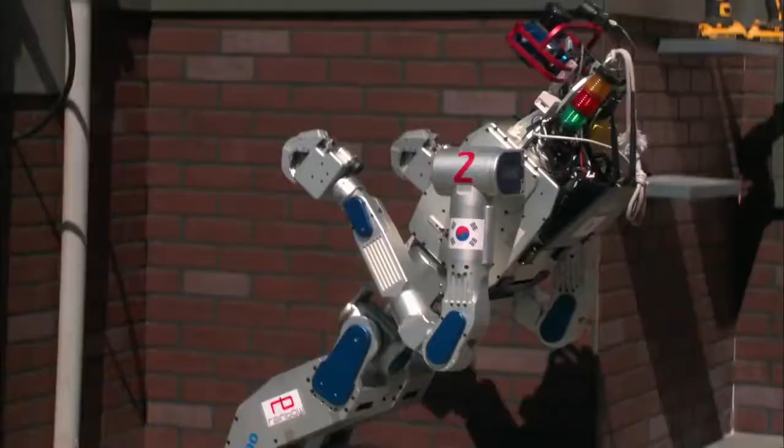It's one of the most ambitious challenges in the history of technology. Ladies and gentlemen, start your robots. The race to build robots that can save lives in a disaster, that can even rescue us. But to do that, they'll need to climb ladders, walk over rubble, turn valves.

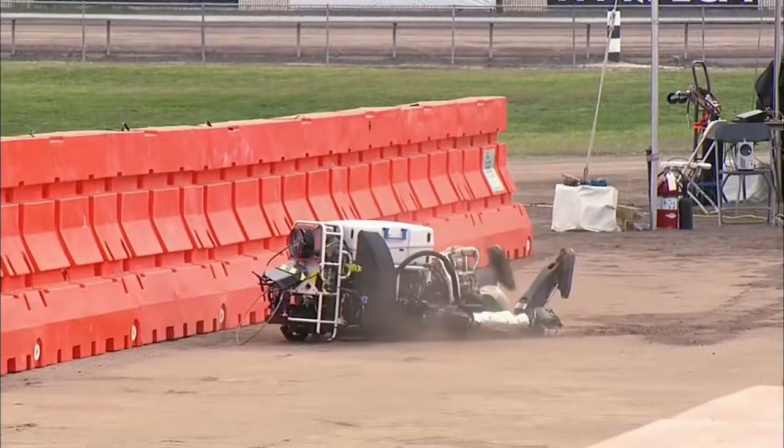And no one knows if it's even possible. There's so many things that could go wrong. It's scary. When you try to instill human-like intelligence, human-like manipulation skills into machines, it's just very, very hard to do. What will it take for robots to have the right stuff?

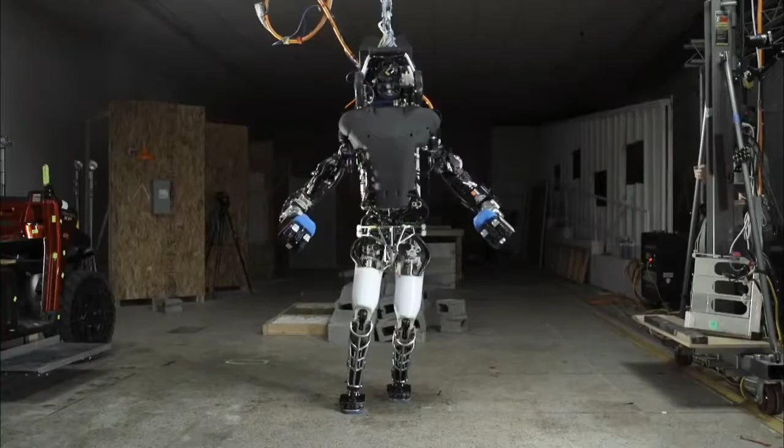And are we ready for the consequences? It's too easy to look at them and say, oh, they're not there yet. They will get to something very powerful. And then you have to say, well, where will we have gotten to? They might actually have the capacity to be smarter than us.

What impact will robots have on our future? On how we work, how we interact, even how we see ourselves.

Rise of the Robots. Yeah! Right now on Nova.

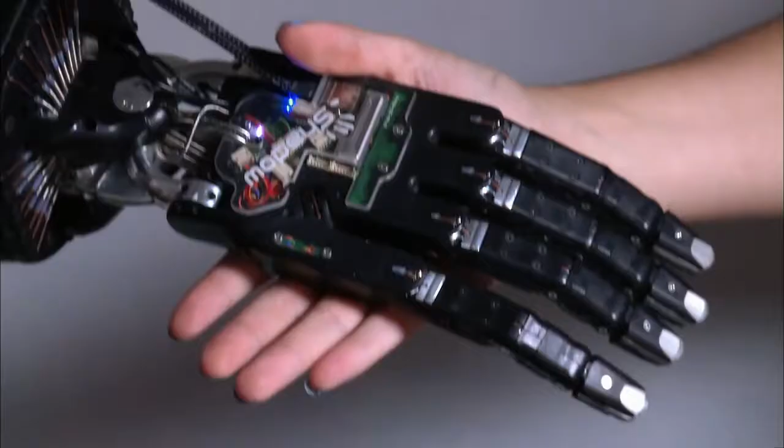Especially in Japan, where bots are starting to cook for us, do the laundry, even sing and dance. Some look so human, it's hard to tell them apart. But looks can be deceiving.

People see these humanoid robots developed in Japan and all these fancy things, and they had the expectation that, oh, we have these robots and they're gonna save the world. But that didn't happen.

March 2011. A devastating earthquake and tsunami rocked Japan. Explosions and fires at the Fukushima Daiichi nuclear power plant left the area dangerously radioactive. Going inside, even for a few minutes, was life-threatening.

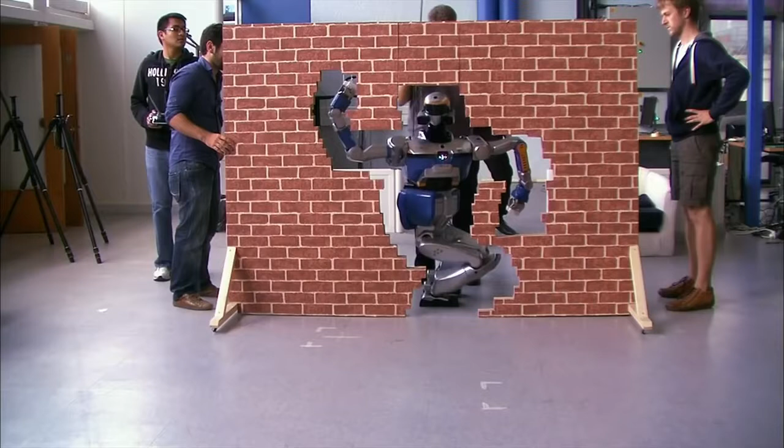It was the perfect time for Japan's cutting-edge robots to come to the rescue. But none did. The real tragedy was if simply some valves could have been turned, or some switches could have been flicked, or hoses attached, a lot of the meltdown could have been prevented. The question was, when robots were needed the most, just how come they weren't effective?

And so I think that led to a lot of reflection. After decades of research, where were our robot heroes?

For generations, science fiction has portrayed robots as our loyal servants. Welcome to Altair 4, gentlemen. I am to transport you to the residence.

But it turns out, our imagination has taken us much further than our technology. It's hard to create robots that can function in our world. One of the challenges with deploying robots in the real world is that the real world is like the wild, wild west. It's very rich and complex and very unforgiving.

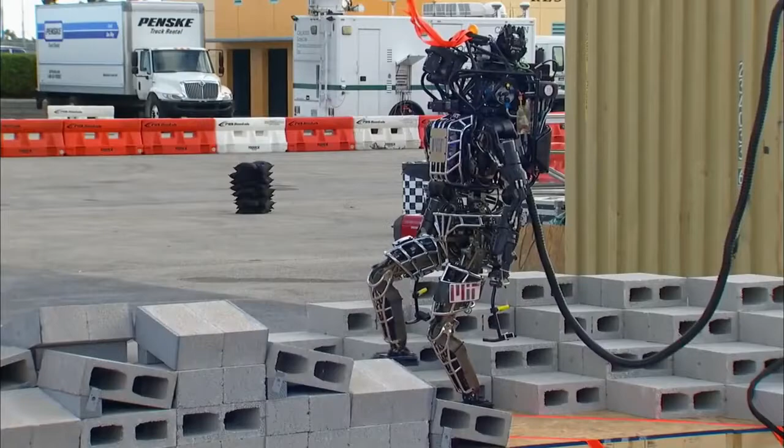What will it take for robots to make their way out of the lab and into the real world? We're about to find out. Ladies and gentlemen, start your robots, at the most ambitious robotics competition in history.

We welcome you to the DARPA Robotics Challenge. This is where imagination meets innovation. You have completed the course!

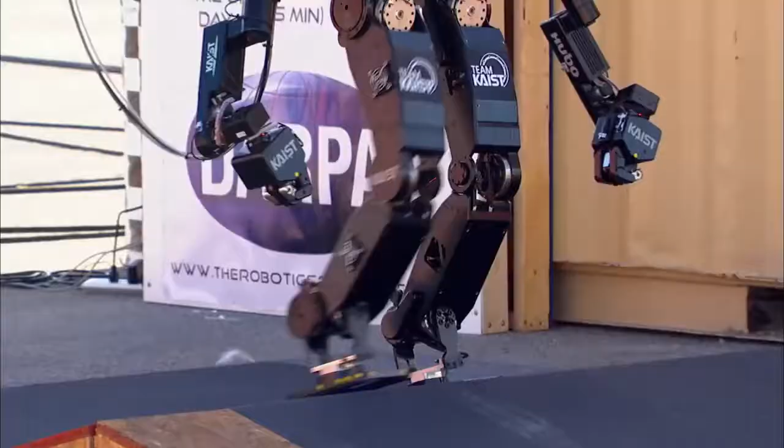In 2013, at a racetrack on the outskirts of Miami, DARPA, the research arm of the U.S. Department of Defense, challenged 16 teams from around the world to build rescue robots that can help save lives in a disaster.

Very exciting, very exhausted, very nervous, and frustrated at the same time. Dealing with robots is always like that. It's the kind of challenge DARPA is known for: cutting edge and high risk.

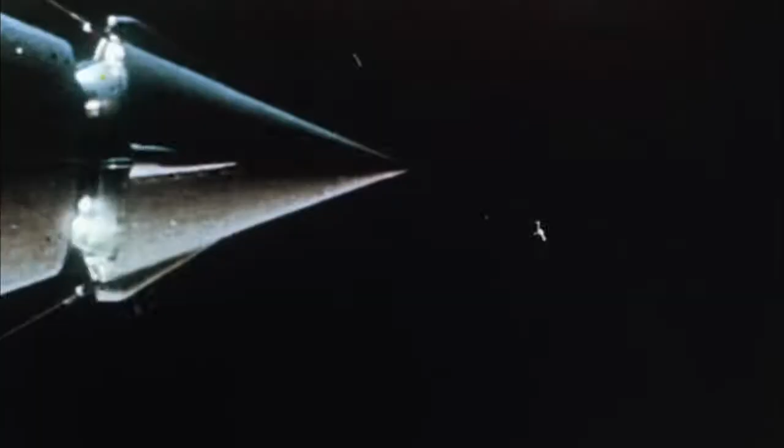DARPA was formed back in the 1950s in response to the launch of Sputnik, the world's first artificial satellite, built by the Soviet Union. Since then, the agency has spent billions developing military technology, advanced weaponry like stealth technology, drones, and night vision.

But the spin-offs from this research have gone far beyond the military. The internet, GPS, bionic arms, even Siri were all fueled with DARPA funding. Cancel golf today, it's off your calendar. Good.

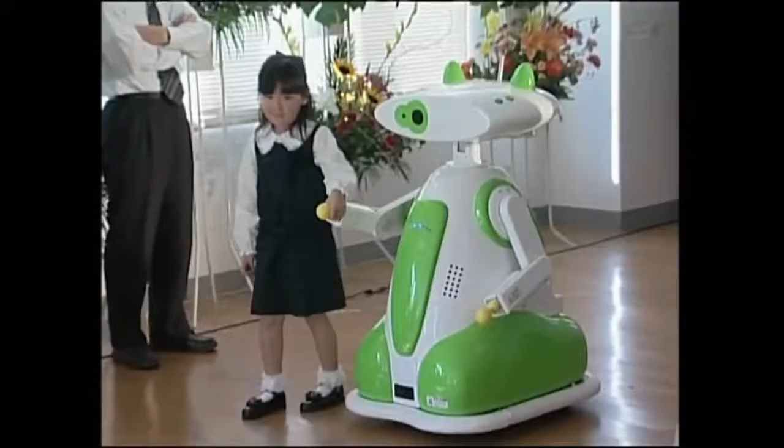If these researchers succeed in creating rescue robots, the same technology could be used to develop robots that take care of the elderly, babysit our kids, clean up after us. Robots in almost every facet of life.

But first, can robots really help out in a disaster? To find out, DARPA has set up an obstacle course for bots, with human operators controlling their every move. Yeah, here we go. The robots must perform basic tasks like opening a door.

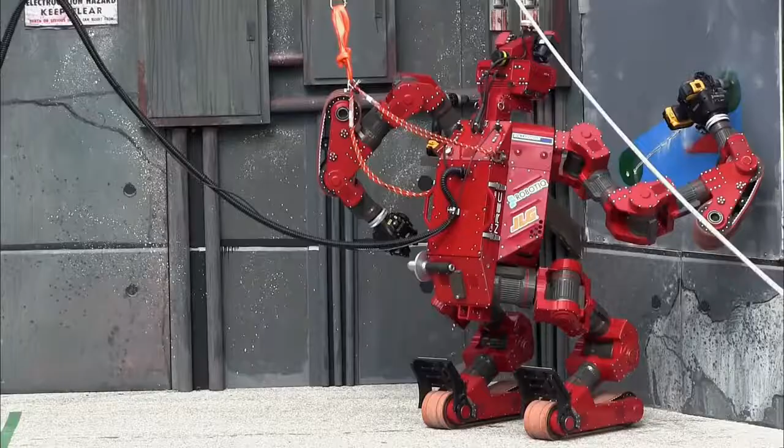All right, go, go, go. Turning a valve, drilling a hole in a wall, walking over rubble, even driving a car. Bot after bot takes their first steps into the real world.

And there's nothing easy about it. It's a monumental challenge. DARPA calls it DARPA hard. I almost said it was DARPA impossible.

Robots fall off ladders. Some barely move an inch. They even struggle to open doors. The things a human can do instinctively, easily—you don't realize how hard something like

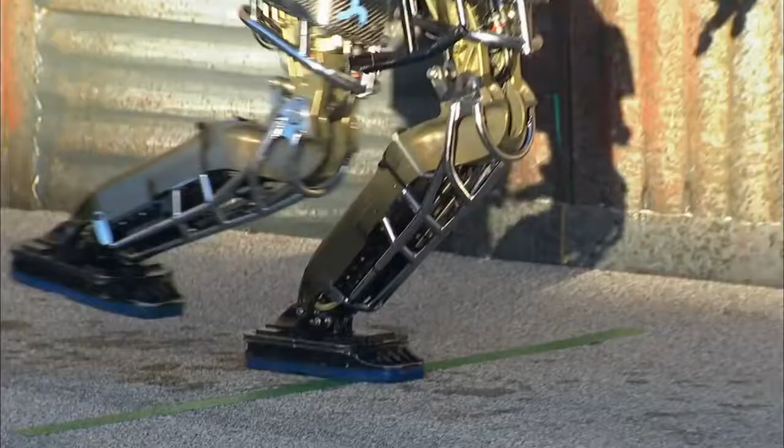walking is until you try to reproduce it in a machine. When my baby daughter took her first step, did she walk? No, she took a step and fell down, right? Over time, she started to walk. And it's kind of like we're seeing here. There are a lot of baby steps.

After 2 days of competition, the results are not impressive. But this is just the start of DARPA's grand experiment.

The agency is giving the roboticists another chance to get it right, and they're putting their money where their mouth is. The top-scoring teams in this first challenge are receiving $1 million each to continue their work. In 18 months, they'll return for the final challenge and the chance to win a grand prize of $2 million.

It's not clear to me how well the teams are going to do. They can't be too hard because then everybody fails. Can't be too easy because then it's not worth doing at all. But if you make it just right, like Goldilocks, right?

I have tried to hit the sweet spot of difficulty, but I think risking failure is the DARPA way. Will the challenge push the technology a giant step forward?

Will robots ever make their way through our world the way we do? No.

Back in the early 50s, Alan Turing, one of the founders of artificial intelligence, said that the best thing we could do was build a robot with TV cameras for its eyes and motors to drive its legs and have it romp around the countryside and learn from the real world. But he decided that was technologically too hard back in the 50s, which it certainly was.

So he said, let's leave that physical interaction to later, and let's work on more abstract problems, the intelligence abstract problems. The field of artificial intelligence, or AI, has already built machines that beat us at chess, trade stocks with lightning speed, and search for anything we want in an instant.

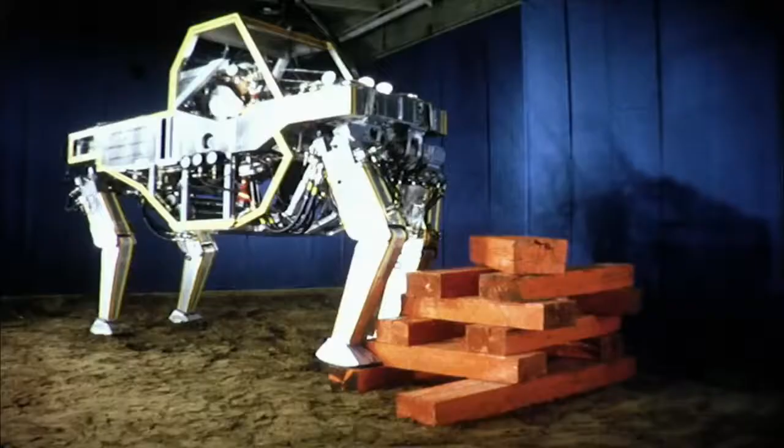Yet when it comes to robotics, progress has been painfully slow. Some of the biggest problems robots face are things we humans usually take for granted, like mobility, manual dexterity, and the ability to see and understand our environment.

These are the challenges the robotics teams will tackle in the DARPA competition, beginning with mobility. What's the best way to make a machine that can move through our world? Does it need to walk on 2 feet like us?

Some roboticists think the answer is yes. The shape of the robot is dictated by what it needs to do. There's a reason why the step size in your home is this big. There's a reason why your door handle is this high, because it's designed for humans to move around. So unless the robot is the shape and size of a human, it won't be able to navigate and move around in an environment designed for humans.

But getting around on 2 feet isn't easy, even for us. It takes your average infant almost a year to go from crawling, to toddling, to walking. What does it take to give a robot this intrinsic human ability? It's one of the biggest problems facing roboticists today.

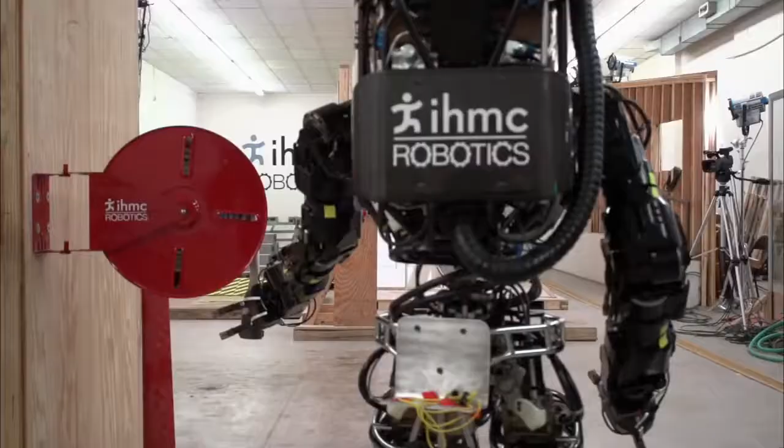In Pensacola, Florida, at the Institute for Human-Machine Cognition, or IHMC, one of the teams competing in the DARPA Robotics Challenge is hard at work developing its own software to run this massive bot named Atlas, a 330-pound powerhouse. DARPA funded the design and development of this rescue robot.

Several teams competing in the challenge are using this hardware, but writing unique software to guide their robot.

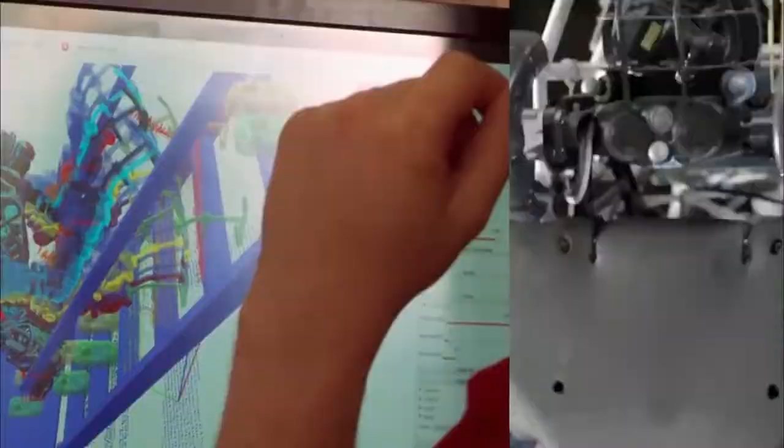You might wonder why Atlas is so top-heavy. Most of its oversized head is packed with cameras and sensors, and while its feet may look small, they're designed to fit in the kind of places we walk.

With bipedal walking robots, there's still a lot of strategies we have to determine, and there's no known textbook solution yet. It's more art than science still.

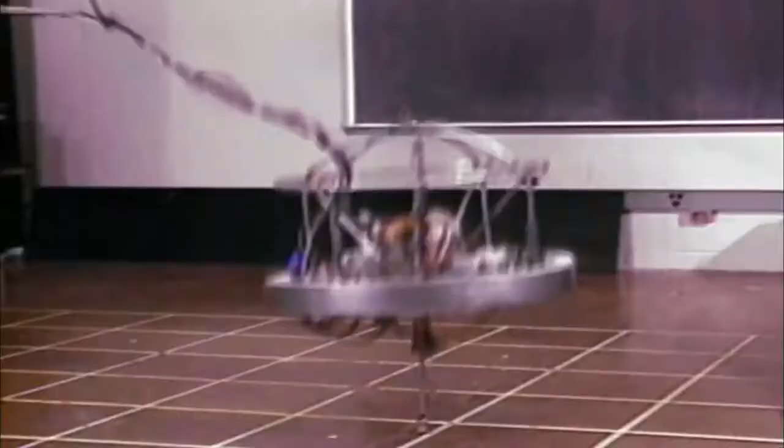For team leader Jerry Pratt, finding the best way for a bipedal robot to walk has not been easy or quick. I've been working on bipedal walking robots since 1994, so 21 years now. He started back in graduate school at the MIT Leg Lab, where some of the most bizarre-looking bots hopped, jumped, and flipped. But the robots Jerry built were different, because they walked on 2 feet.

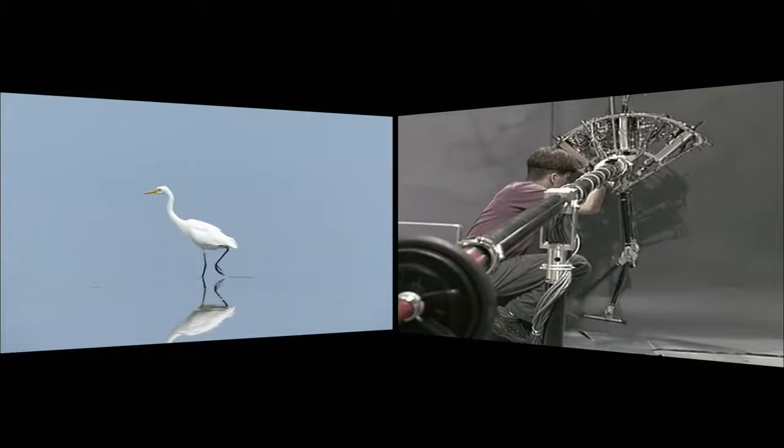Using nature as his guide, Jerry gave his bipeds hips, knees, and ankles that mimicked how animals move. This one, called Spring Flamingo, had specially designed motors that worked a lot like muscles, varying the amount of power each joint used. Its legs and feet worked a bit like shock absorbers. They had a little give. That robot was a really good workhorse. We had it working for about 3 years, probably walked about 20 miles or so.

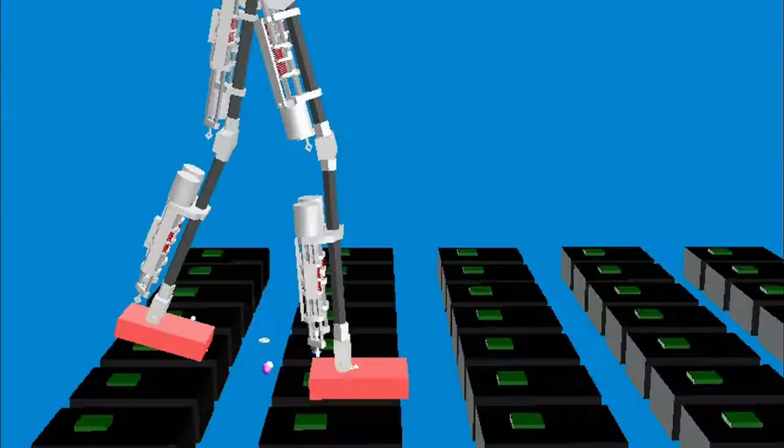When it came to designing a humanoid, he focused on developing the perfect combination of hardware and software that would enable his biped to stay upright as it calculates the best way to shift its center of mass, lift its leg, swing it forward, and put its foot back down in the right place, and with just the right amount of pressure. To make these elaborate calculations, the robot needs instructions, lines of code that tell it how to move.

These lines of code are written in a programming language that resembles English. But for Atlas to use them, its onboard computer has a program that translates them into a language a machine can understand: zeros and ones. It takes more than 2 million lines of code to run Atlas, 500,000 just to put one foot in front of the other.

It's the interplay of hardware and software that keeps this bot on its feet, an ability that took hundreds of thousands of years of human evolution to perfect. We'll often look at what strategies a human uses in order to walk, because the physics in the world that a human operates in is the same as the robot.

But we wouldn't be able to take a single step without having some pretty amazing senses. When you walk, your eyes detect the position of your body relative to the world around it. At the very same time, a series of fluid-filled canals in the inner ear tells your brain the position and motion of your head, so you know which way is up. And a kind of sixth sense called proprioception uses your muscles and nerves to detect where your arms and legs are in relation to each other. All this information comes together in a part of the brain called the cerebellum.

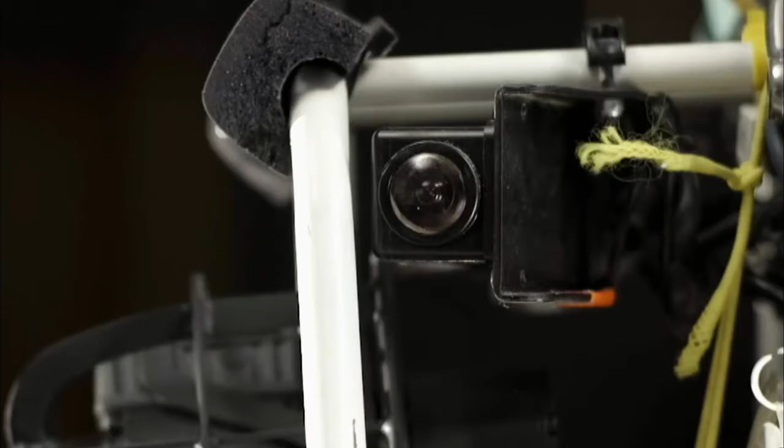What kind of senses does Atlas use to walk on 2 feet? For eyes, the bot has a stereo camera and a couple of fisheye lenses sticking out the side of its head, along with a spinning laser called LiDAR that scans everything in the world around it and creates a 3D model of its environment. Atlas doesn't have an inner ear to tell it which way is up. Instead, it uses a small cylinder in its rear that contains gyros and accelerometers that tell it where it is and how it's moving.

In addition, sensors on each joint tell Atlas where its limbs are in relation to each other. The result is an extraordinary sense of balance, allowing Atlas to stand on 1 foot like a ballerina, at least in the lab. But in the real world...

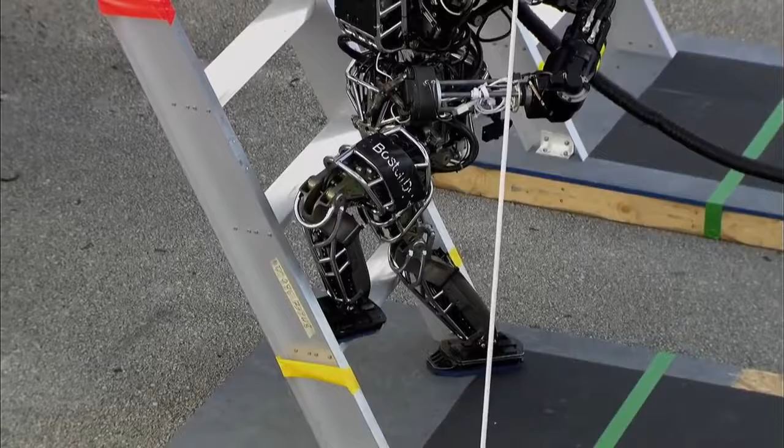Atlas's gyros and sensors aren't always enough. We only have a limited number of sensors on the robot, whereas with a human or an animal, you have thousands of little force sensors on every square inch of your body, over 100,000 just on the soles of your feet. You can step on something and detect what it is, whereas the robots, they don't know that. They just know they stepped on something.

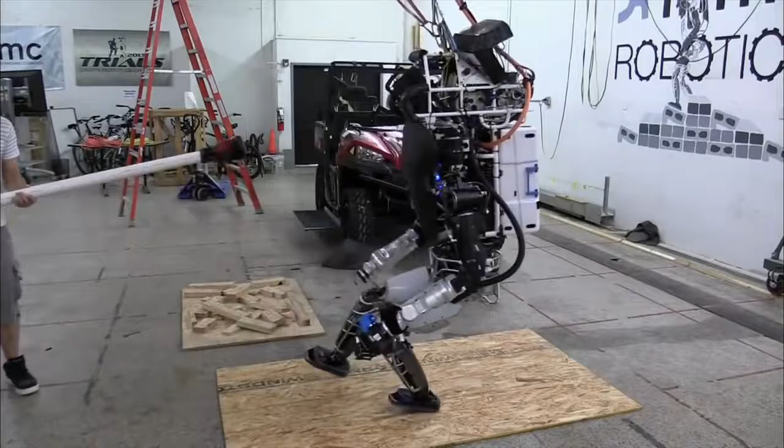At the final challenge, if Atlas should step on something the wrong way, if the hardware and software don't work perfectly, it will fall. We cannot get up from a fall currently, and we probably won't survive a fall. If we fall during the finals, that may be the end of our whole weekend.

Atlas isn't the only biped that has trouble staying upright. Meet Hubo, designed and programmed by cousins Paul Oh and Jun-Ho Oh.

At the first challenge, Hubo clearly wasn't ready for the big, bad world. It's with fondness, but also with some pain, that we think about it. We went into the challenge with quite a lot of enthusiasm, but when we got there, it was just one thing after another. There were a lot of real-world instances that we did not experience in the lab. That was a real awakening.

Across the ocean, at the Korea Advanced Institute of Science and Technology, Jun-Ho Oh is also doing some soul-searching. Our expectation was very high, but the result was very catastrophic. So the gap was too big. It took at least a couple of months to recover, then I got back to my normal mental state.

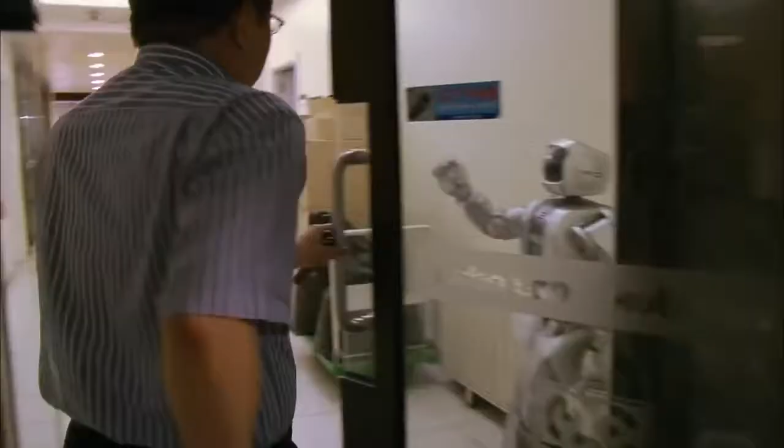After the shock wore off, the cousins agreed to make a radical change in the design of their biped. My cousin came up with this idea of adding wheels to Hubo's knees, as well as casters on its toes. I call it the kneeling prayer mode. Others like to call it wheeled mode, or transformer bot mode.

Okay, so we are so happy. We decided: short distance movement, just walk, okay? And far distance, we move on wheels. It's much more stable.

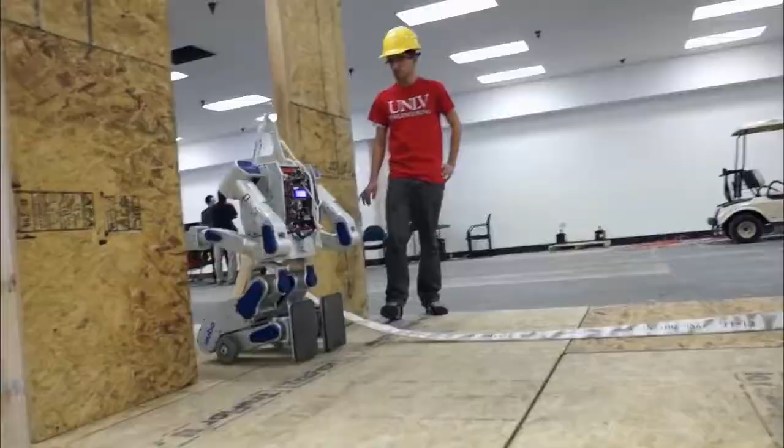Humans don't have wheels on the knees, but there's no reason why we can't add that to a robot. When the cousins return for the final challenge, they'll debut their humanoid transformed with the help of some clever engineering.

But for a robot to help out in a disaster, getting there is just the first of many challenges. To assist rescue workers in the real world, it needs hands, with the kind of strength and dexterity it takes to lift heavy hoses, drill into walls, solder, and saw. It needs a pair of these.

Our experience of the human hand is that we can do everything with it. We can dig ourselves through rubble, we can make really nice paintings, we can knit. The human hand really distinguishes our species from all other species.

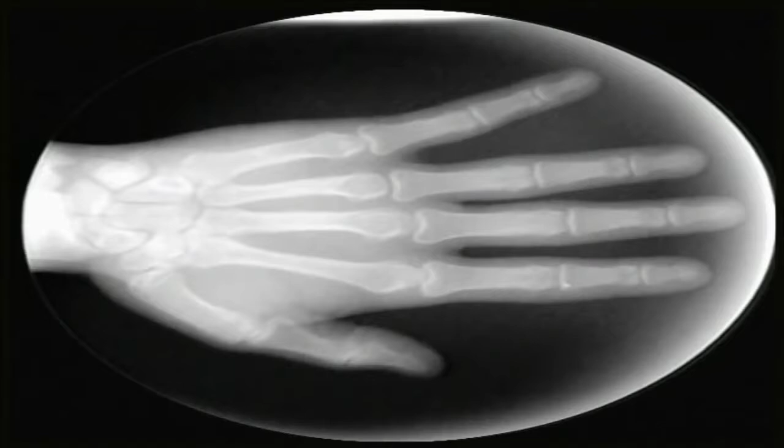If you look at the way humans manipulate objects, we have this instinct for tactile sensing, for feeling the world. Understandably so, we've had over 200,000 years of human evolution to get to this particular point. Is it possible to translate a masterpiece of evolution into motors, cables, sensors, and thousands of lines of code?

On the outskirts of London, behind an unassuming storefront, a small group of robot enthusiasts are building a robotic hand that they hope could one day rival our own. When we first started building a hand, we actually bought anatomy books and tried to understand how the hand works. We thought it'd be good if we could copy, as best we can, the human hand.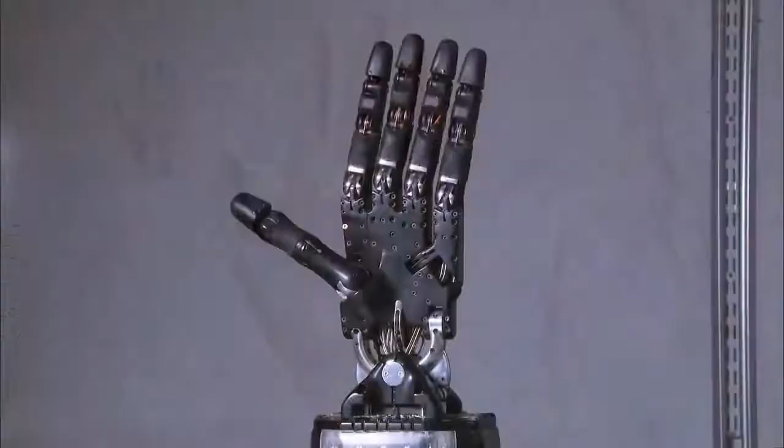The Shadow Hand was built with the idea of trying to get as close as possible to the human hand, but as engineers. Like the human hand, this robotic version has four fingers and a thumb. It's about the same size as the original, and can even shake like one. But that's where the similarities end.

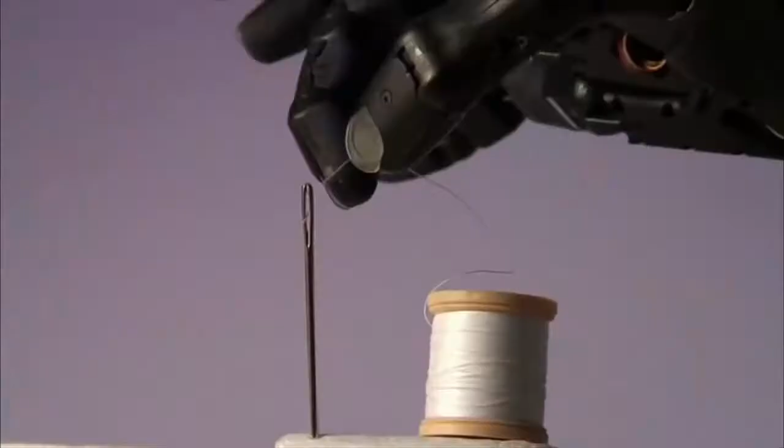We pack a huge amount of sensing and actuation. We have 25 joint position sensors, 9 analog to digital converters. We have 2 tendons coming from each joint to a motor in the forearm, 20 motors in the forearm. Each motor has a temperature sensor, a current sensor, and 2 force sensors, so we can tell how hard the motor is working and how hard it's driving the tendons. We put contact sensing in the fingertips so we can tell that we've touched something. So there's a wealth of computing power just to get something that has the same set of movements as your hand.

And with this level of dexterity, it can do a lot more than card tricks. We had this hand handling pipettes and lab equipment, removing the human from the risk—for example, people who work with very, very nasty bacteria and viruses.

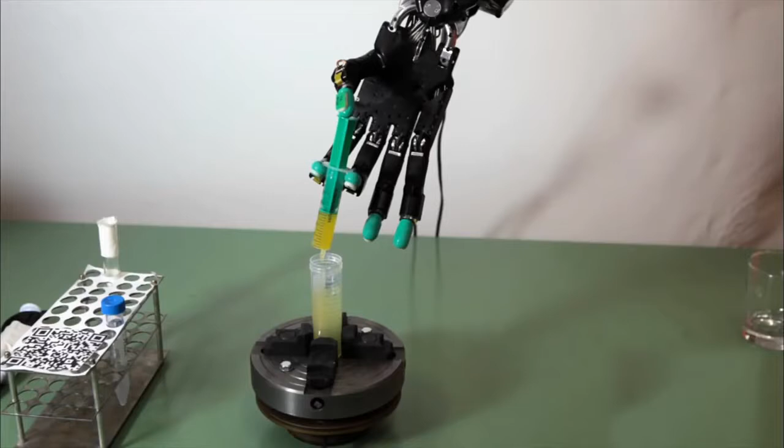The Shadow Hand was designed for delicate tasks, not for dirty jobs like this. When you look at where robot hands get used, you find people who want to do something delicate and precise, and people who want something big and rugged and solid. For the robots in the DARPA challenge, strength and precision are a must.

Finding the balance between them has been a struggle for team leader Brett Kennedy, who developed this four-legged rescue robot named RoboSimian here at NASA's Jet Propulsion Laboratory. My first intuition is that this needed to be a very robust hand, and I'm thinking, well, robust means big. Why don't you go find out how big Wilt Chamberlain's hand is and make a hand that big?

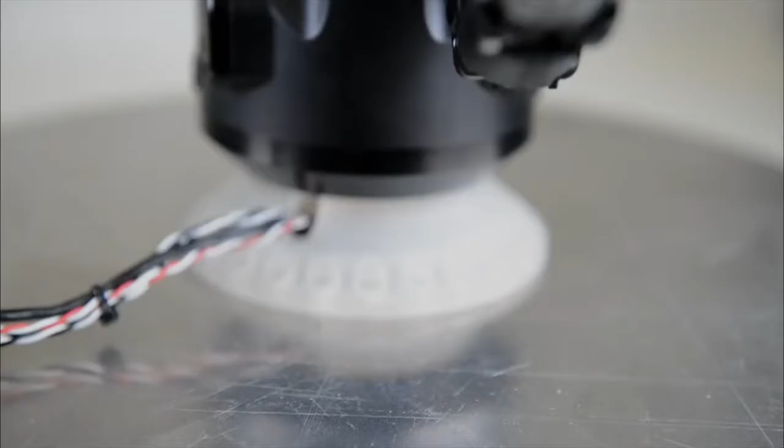So if anybody's curious, Wilt Chamberlain's hand is very, very big. And not only is it very big, when you make a robotic version of it, it actually cannot deal with normal human scale tools. So they modified their design, making a smaller hand with just 3 fingers.

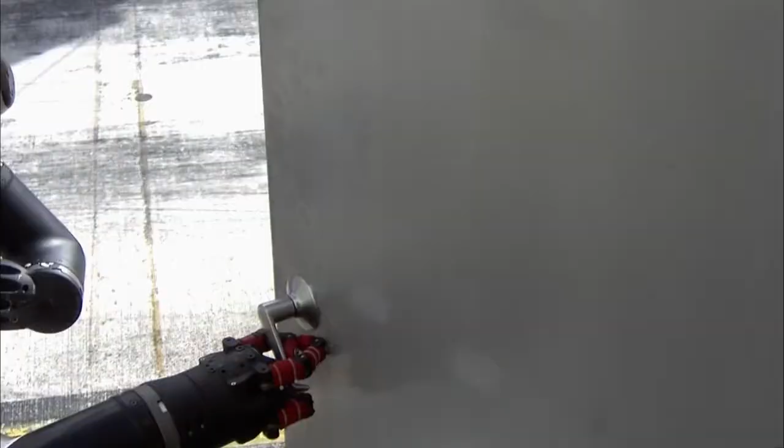This does everything we needed it to in the competition. It grabbed everything, the human tools, so we thought we were in pretty good shape. But then, at the first challenge, RoboSimian had to open a door, and things got messy. Here's an individual finger, and in that finger there's an artificial tendon, a synthetic fiber. When excessive forces happen, it snaps.

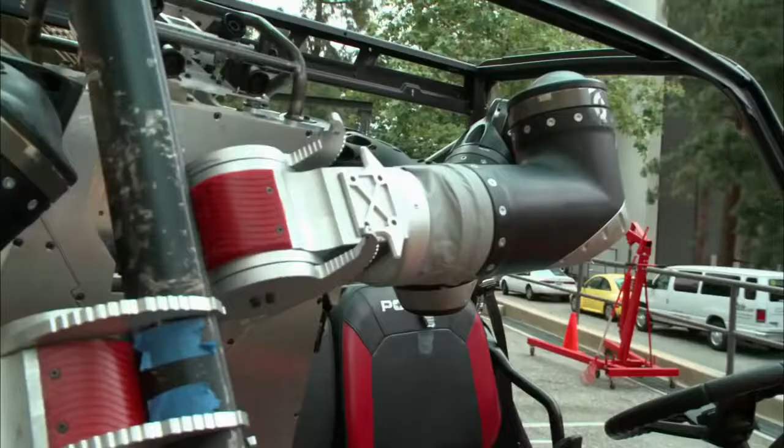When Kennedy realized RoboSimian's fingers couldn't provide the strength he was looking for, he came up with a radically different idea. So this is the cam hand. To do most of the work we need, a simple hook works just fine so we can actually get a grasp and hold on to most everything we have to. Fact of the matter is this is a very simple, dumb system. It closes until it encounters something, and then that holds it, and holds it securely.

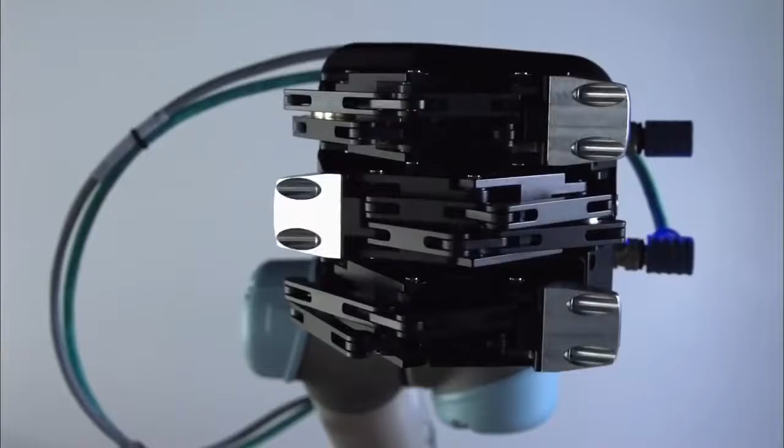In their quest to grasp victory, the teams competing in the DARPA Challenge will rely on all kinds of hands. Many are using this gripper, designed with 3 fingers that can wrap around a variety of objects and even pick up something small. If we look at tasks like opening a door or using a drill, using hand tools and things, pretty much all these tasks you can perform using 3 fingers.

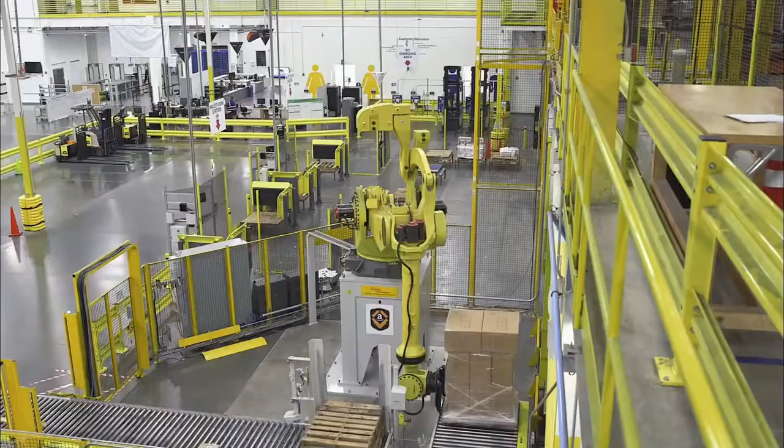Robotic grippers have already made their way onto the factory floor, attached to massive robotic arms that are as robust as they are precise. They build cars, lift heavy boxes, pack beer, sort through anything and everything, from batteries to pancakes, doing the kind of jobs many people consider repetitive and downright boring.

But some experts fear as robots move beyond the factory into the real world, they'll take on a lot more. I think that we will lose at least 20 or 30% of our jobs over the next 20 years, and probably more.

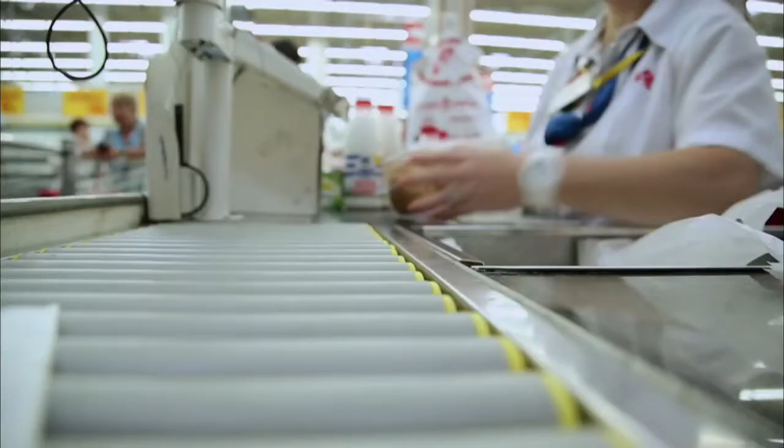Fast food workers are mostly going to be replaced. The cashiers at Walmart, their jobs aren't going to last that much longer. The first to go are going to be drivers. Uber is spending a lot of money on driverless cars. Google is spending a lot of money. Now Toyota is too. 40 years from now, there are not going to be a lot of jobs.

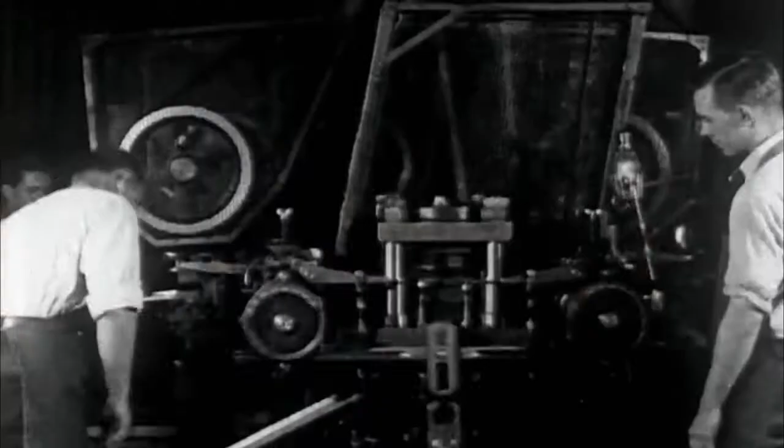But not everyone agrees the future looks quite so grim. Over the past century, while robots and automation took over many manufacturing jobs, other kinds of jobs have increased. Some think that trend will continue. Machines in all of modern economic history have helped create jobs, not taken them away. Machines are complements to workers, not substitutes. They come together and enhance the productivity of each. They need each other.

Today, more and more jobs require humans to work side by side with robots, on the assembly line, programming them, and repairing them. Technology creates new jobs, but only for those who have the skills to adapt.

What happens to the workers left behind? The worker who was displaced has to be compensated through retraining or through a pension. So that's a social problem, not a problem rooted in technology.

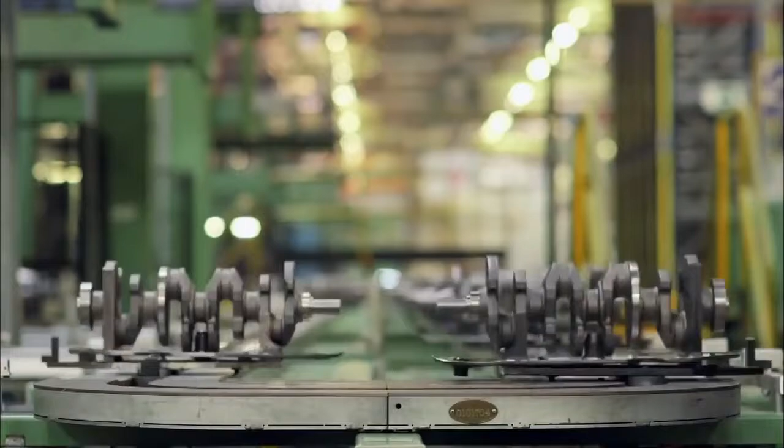People should already be thinking about what kind of society we would want if not everybody can have jobs. Many ethicists say we should also be thinking about which jobs we want to hand over to machines. Much of what we are creating can be used for a whole broad range of potential applications, ranging from elder care and child care robots to healthcare robotic platforms, even surrogate sex objects. What is acceptable? What impact these high-tech machines will have in the workplace and our homes remains unclear.

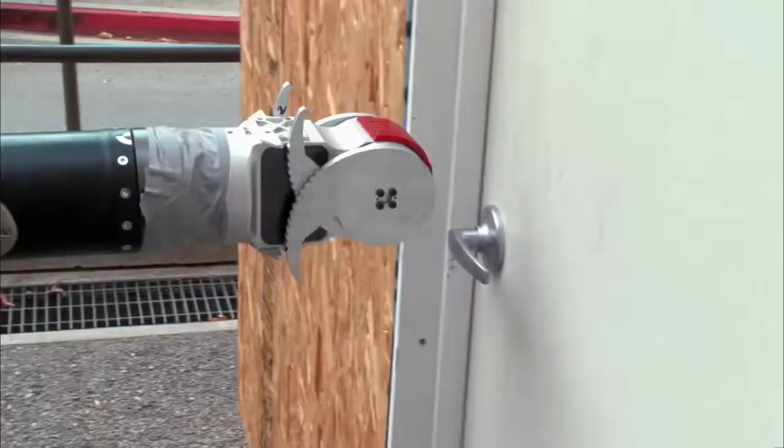But one thing's for sure: robots are starting to take their first baby steps out of the lab and into the real world, learning how to manipulate objects we use every day. But for a rescue robot to be truly useful, there's another hurdle researchers face, the toughest one of all: the challenge of giving a machine the ability to understand its environment.

To give it a brain. Our robot doesn't really have what you'd call a brain. He's not seeing the world, he's not perceiving the world. It's not thinking, it's not reasoning. You know, it's pretty dumb.

Today's rescue robots are so dumb that DARPA permits human operators to guide them step by step. The bot waits for instructions, those zeros and ones that computers understand.

The instructions travel through an elaborate pipeline that connects every piece of hardware, every motor and sensor, to a computer controlled by a team of human operators. The operators communicate with their robots via a wireless connection, just like they would at a real disaster, and at the final challenge.

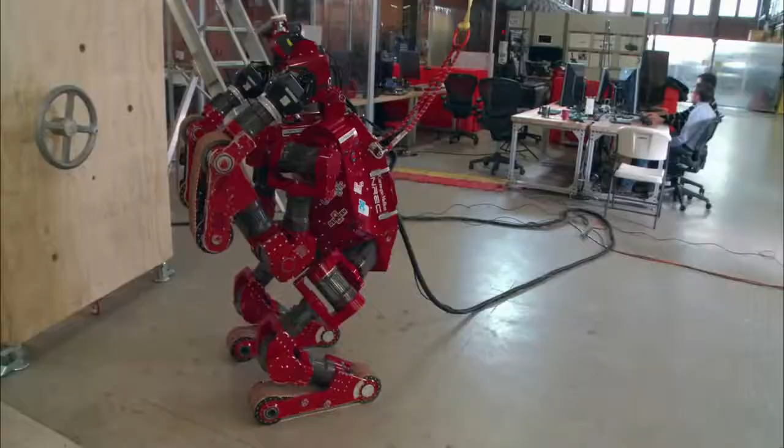These operators at Carnegie Mellon University are about to guide their rescue robot, named Chimp, through one of the skills it needs to master for the final DARPA challenge: turning a valve.

Using 6 different cameras located on the front and back of its head, and a spinning sensor called LiDAR, the bot sends data about its environment to the operators. A 3D image of Chimp's world appears on their monitors.

Chimp has no idea what it's looking at. So with the click of a mouse, the humans tell it exactly where the valve is. Things like recognizing objects, that's a very hard problem in robotics. So we let the human tell the difference between a cat and a dog, a valve and a door.

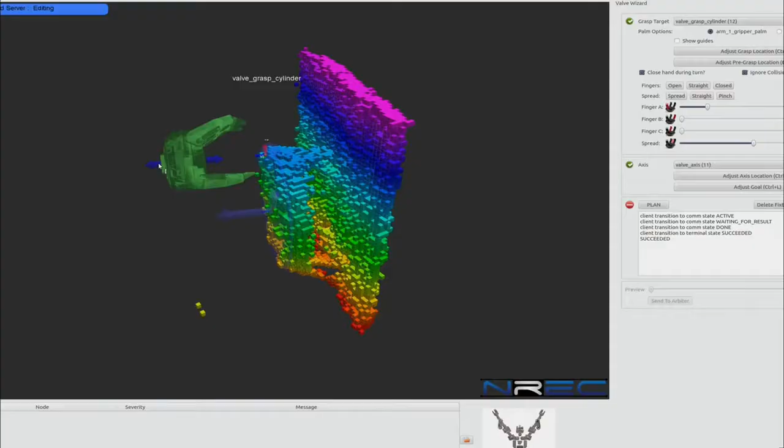Turn the valve. Next, they show Chimp where to grab the valve, which way and how far to turn it.

But it would be impossibly slow and impractical for the operators to tell Chimp how to move every joint, every sensor, every motor of its complex arm. This job must be done by the robot, all on its own.

Using a process called motion planning, Chimp determines the best path for its arm to travel. It shows the operator what its intentions are, what its path will be, how it's going to get there.

As we move towards developing this technology further, we really want to push on the robot autonomy and let Chimp do more things on its own. But we always want to keep this as a tool for a human. In other words, keep the human in the loop and in control.

But that's not every team's goal. At the Massachusetts Institute of Technology, Russ Tedrake is taking a different approach. He's determined to give his Atlas robot as much autonomy as he can, to make it a whole lot smarter.

Our goal as researchers, especially in this artificial intelligence lab, is to solve the long-term research questions about how to make autonomous robots. This is the closest we've ever come to building an artificial intelligence machine where this humanoid robot is moving through the world solving real problems.

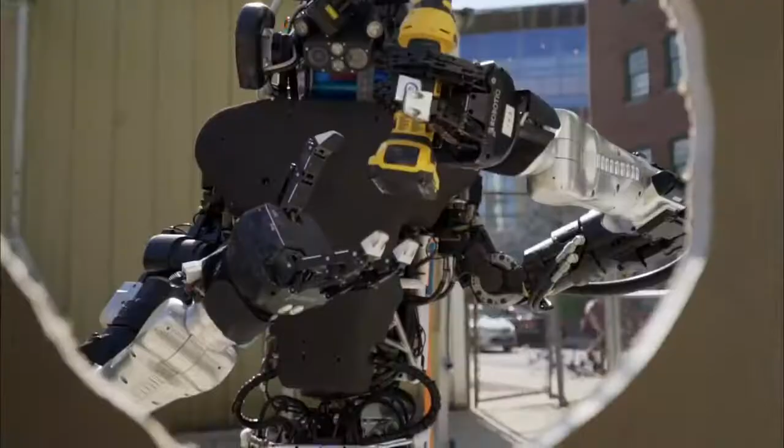At a disaster where you can't always count on a wireless connection, the smarter the bot gets, the more it can do on its own. To create a more autonomous robot, Tedrake is developing software that helps it find and identify objects with a bit more independence.

So if the robot is just looking at my kitchen at home, there's dishes everywhere, and you ask the robot to find a spoon, that's a really hard question. If the human just says, there's a spoon roughly over here, click, he just has to look in a little patch of space for something that's roughly the same shape as a spoon. That takes an extremely hard problem of object recognition in a complicated environment and turns it into a very simple problem of: I want to look for spoon-shaped things in this small region of space.

While Chimp needs its human operators to tell it exactly where a valve is and where to grab it, MIT's Atlas is programmed to recognize a valve on its own, figure out the steps it needs to take as it approaches, then grab and turn it with very little human help.

We can put it in an autonomous mode and basically just watch the robot execute. It shows us what it's about to do. We could always stop it if it looked like it was going to do something wrong. But when things are going well, the robot's operating almost completely autonomously. There's no real input coming from us to the robot at this point. It's just going on with its task.

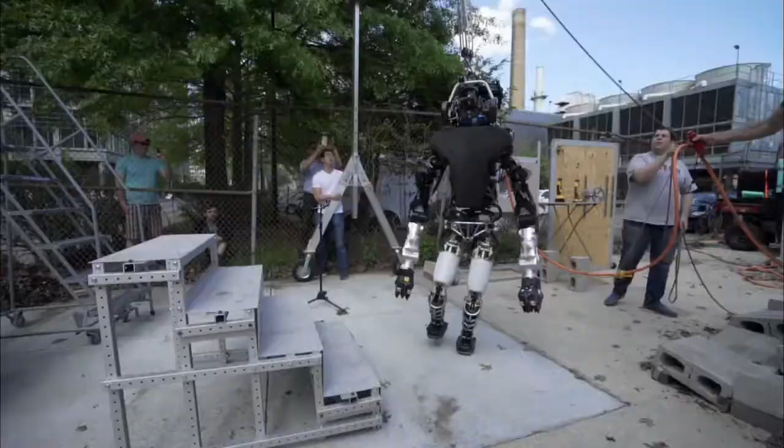A more self-sufficient robot could potentially help save more lives in a disaster. But just how independent do we want rescue robots to get?

What if an autonomous robot enters a disaster and has to decide who lives and who dies? It's the kind of moral dilemma that gave Will Smith nightmares in the movie I, Robot.

You are in danger. When a bot chose to save his life over the life of an 11-year-old girl. Save the girl! Save her! I was the logical choice. It calculated that I had a 45% chance of survival. Sarah only had an 11% chance. 11% is more than enough.

A human being would have known that.

While today's cutting-edge machines, like the thousands of drones used by the US military, still have a human in the loop, what happens in the future if they don't?

There are conversations going on right now about what are the ethical laws of robots. How far should we really push this technology? How much autonomy do we want to give this new technology? Even the semi-autonomous ones raise certain interesting issues, like who's to blame when something goes wrong?

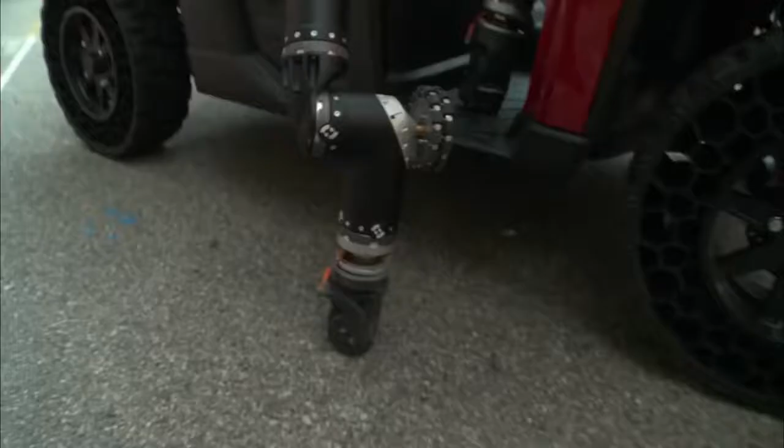But now, just a week before the final challenge, the roboticists are starting to feel the mounting pressure. Brett Kennedy, who leads the RoboSimian team, is no exception. I really have no idea how we're going to place within the overall field at the robotics challenge. All the researchers that are bringing their teams are top flight, so where we end up, I don't know.

Will Jerry Pratt's years of research with bipedal robots finally pay off? Will Paul Oh and Jung-Ho Oh redeem themselves after Hubo's poor performance at the first challenge? My students are very nervous because this is the last chance, and we believe that we can do it. Is Chimp's combination of hardware and software just what its human operators need? Or will more autonomy help or hinder the team from MIT?

There's so many things that could go wrong. The chance that the robot could break, or something that worked 99 out of 100 times, but we get unlucky. It's scary.

June 5th, 2015. Our roboticists meet once again, this time at the Los Angeles County Fairgrounds. Over the next 2 days, they'll face off with finalists from around the world. Several teams come from Korea and Japan.

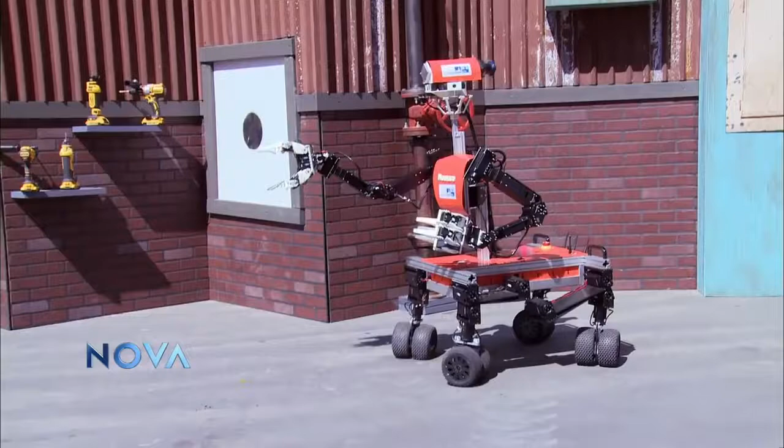This little robot comes from Germany. Most are funded through government or corporate sponsorship. But some bots, like this odd-looking one called Cogburn, are funded by the teams themselves.

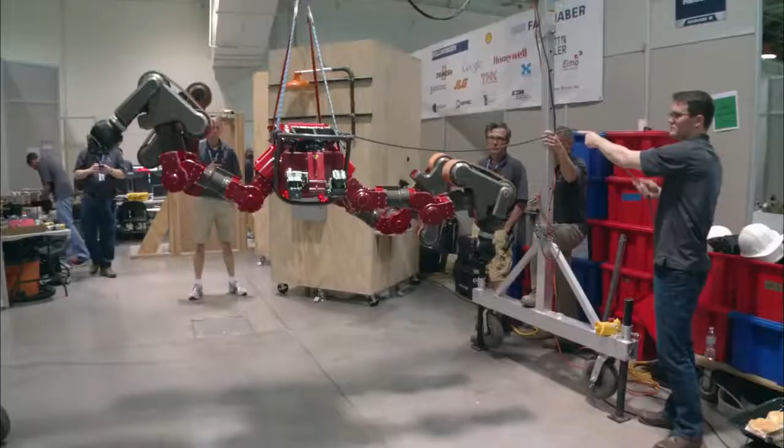We want to be first place in this competition. You too? Yeah, I do, of course. It's a very stiff competition. Looks like there are a lot of good teams. Probably a lot that make it all the way through the course, so it'll come down to top speed.

To win, each robot must perform a series of tasks, a lot like the ones they faced in the first challenge. From driving a car, to drilling a hole in a wall, to walking over debris, to tackling a flight of stairs. The robot that completes the course in the shortest time wins.

That puts a lot of pressure on the operators to keep their bots moving. And DARPA has thrown another wrench into the mix. Just like at a real disaster, the power of the wireless connection between the operators and their robots fluctuates.

Sometimes the robots will receive a degraded signal, just bits and pieces of the data that tells them what to do. Other times, no data, no instructions at all. DARPA is hoping this will push the roboticists to develop more autonomous systems, bots that can finish a job without our help.

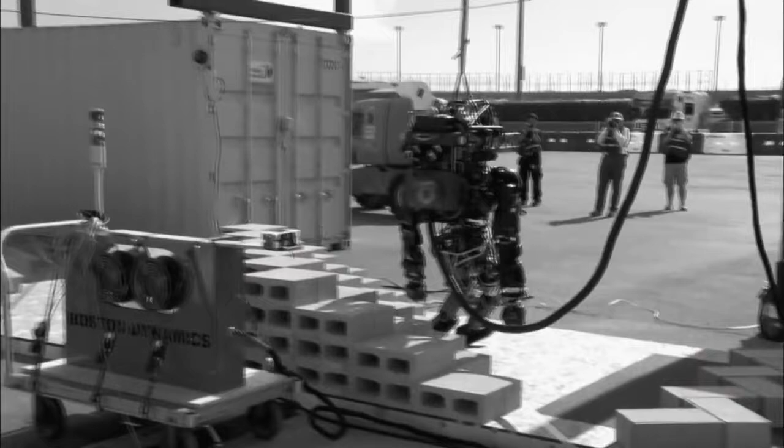But what makes the final challenge downright nerve-wracking is that, unlike the first competition where the bots were tethered, this time around there are no safety lines allowed, putting these multi-million-dollar machines in real jeopardy.

What I was worried about is that almost none of the teams had tested their robots off the safety tether. We had no idea when these robots fell how badly they would break, so many of the teams were really scared.

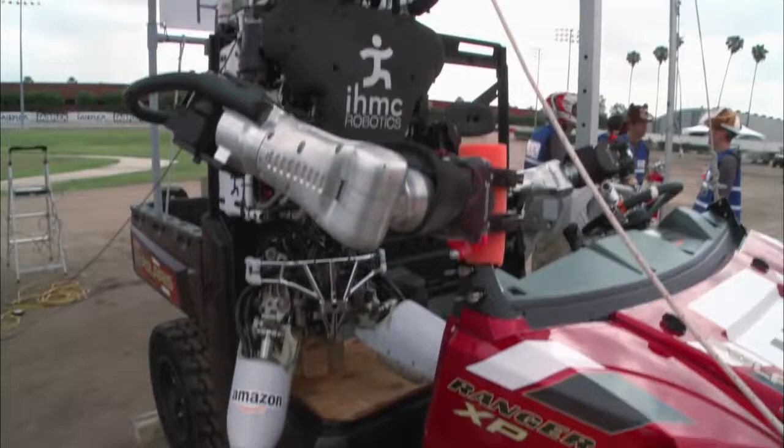Finally, the competition begins. Each robot has 2 chances to run the course. IHMC starts their first run. The robot drives without a hitch, walks up to the door with ease. All right, going through the door. All is looking good. Just 2 more tasks to go. Nice.

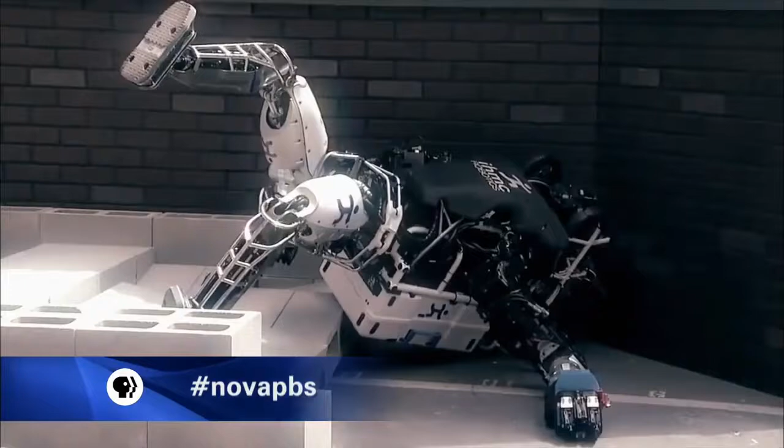It's Jerry's worst nightmare. After years of perfecting his walking software, a tiny misstep in the real world brought one of the most advanced robots on Earth to its knees.

Nobody was really sure if the Atlas robot would survive a fall. We've never had Atlas fall before today. The team worries the bot can't be repaired in time for its final run.

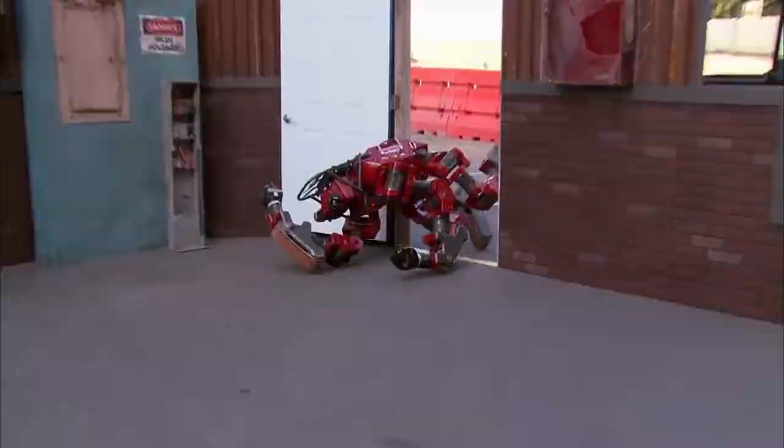For Carnegie Mellon's robot, Chimp, the day is also filled with ups and downs. When he fell down through the door, he's laying there and we're just, oh no.

Back in the garage, the operators scramble to find a way to get the red bot back up on its treads again. But the bigger a bot, the harder it falls.

Smaller robots fall without breaking and have truly bizarre ways of getting back up again. But they're too small to do the kind of heavy lifting rescue robots need to do at a disaster.

Once you make it heavier and larger, you need stronger motors, and stronger motors mean heavier motors, and heavier motors increase the overall weight. Chimp weighs over 400 pounds. That's an awful lot of robot to lift.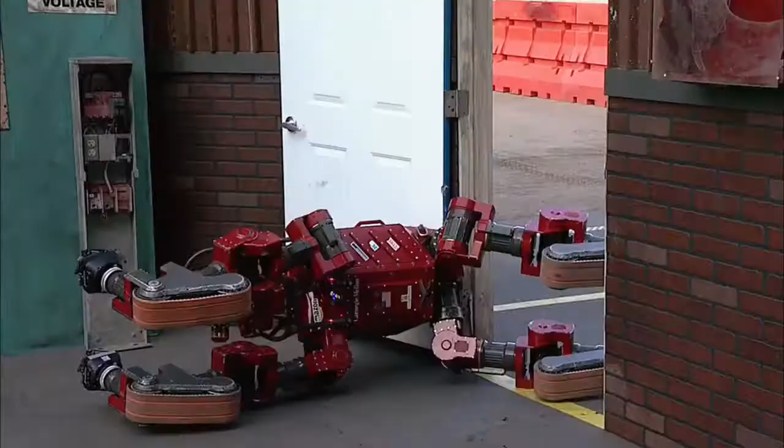The crowd begins to wonder if its run is done. I found it fascinating to watch the crowd watching the robots. This was really an emotional moment. You know, they're collections of wires and gears and motors, and we were sympathizing with them at a very basic level.

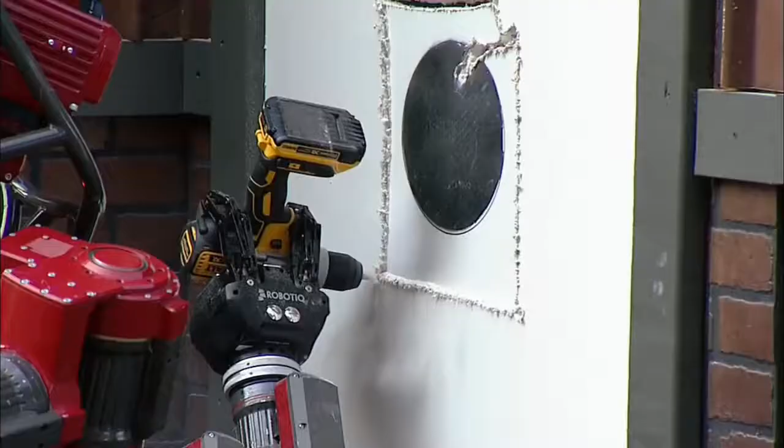Then Chimp's leg begins to move. And this little kid down in the front screams, 'He's getting up!' The bot not only gets up, it completes all 8 tasks, becoming the first robot to finish the course.

But not every team is so lucky. As MIT starts its run, hoping to show off its robot's autonomy, things run amok in the control room. We made a simple operator error when we went to get out of the car. We forgot to turn off the driving controller, so the foot tried to push the throttle when it was getting out of the car.

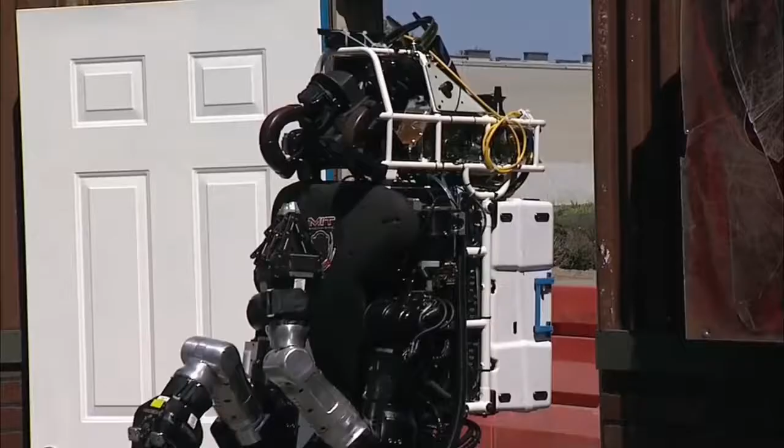In an effort to drive and get out of the car at the same time, the robot keels over and breaks its right arm. But the operators were able to recover and do basically the entire course left-handed.

The robot is still able to do most of the tasks, but it faces one insurmountable problem. The team has programmed it to use 2 hands to pick up the drill and turn it on. It can't do that when one of its hands is broken. Without completing all the tasks, Team MIT has no chance of winning.

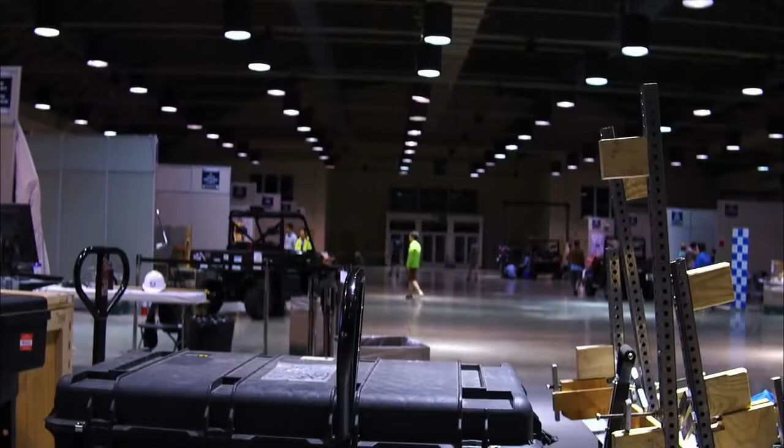A weary Team IHMC has worked through the night trying to fix its robot. Somehow the robot's still working, but the fall we took did something with the robot where he's kind of messed up a little bit.

There's something wrong with its LiDAR, the system that scans the robot's environment. The operator's going to have to adjust on the fly and compensate in his head for the errors in our sensors. Are we really leaning that much? Our strategy is still what it was yesterday, 8 points or bust.

The time has come for their final run. They make it through all the tasks, points earned, and approach the dreaded debris, where they fell on their first run. All right, you got to swing the right first.

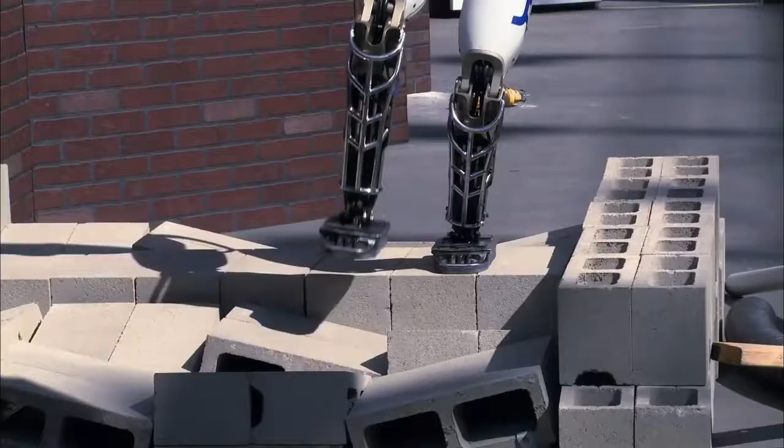But this time they succeed. The operator guides their robot all the way up the stairs, finishing the course in record time.

Having a human in the loop, you've got a supercomputer up here. Humans can adapt to just about anything. 8 points confirmed. The team is now in the running for first place.

But a one-of-a-kind bot could still give them a serious run for their money. Cousins Paul and Jun-Ho are each competing with their own robot, doubling the chances that one of their humanoids on wheels will win the day.

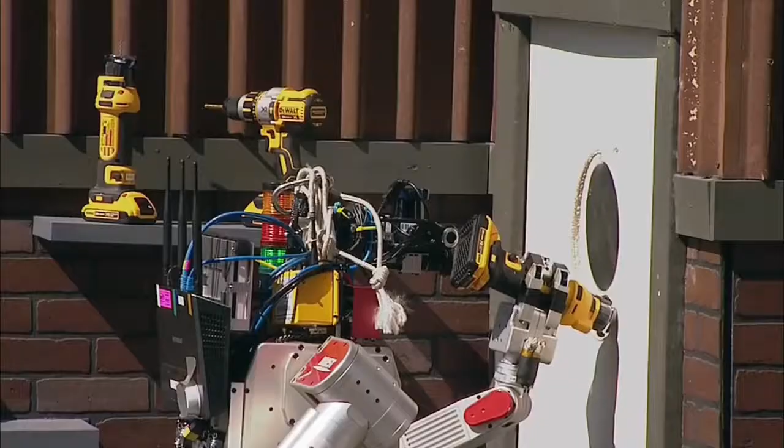Paul's team makes it as far as the drilling task, until the drill gets stuck, overheats, and shuts down. But cousin Jun-Ho's team moves on. Their robot completes all the manual tasks by rolling on its knees or standing on its feet.

But when it approaches its final task, the stairs, it suddenly stops. Back in the garage, its human handlers are double and triple checking the instructions they're about to send their robot. A mistake here will cost them the competition.

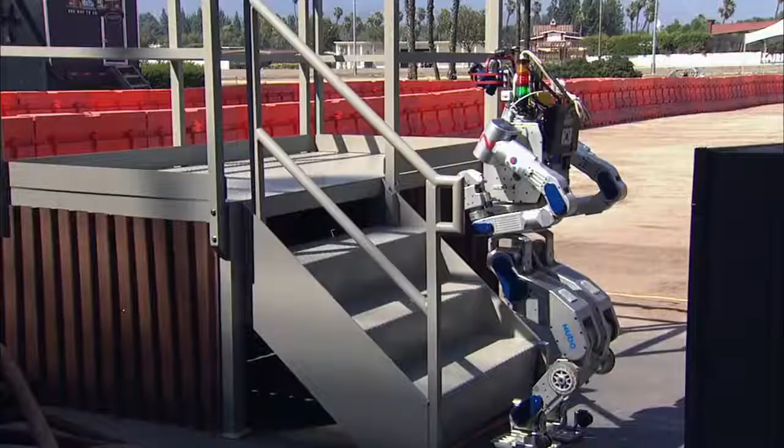You have to understand that when the robot is stationary, the operating room is very, very busy. If the robot is moving, they don't do anything. Their job is done. All they can do now is watch and wait.

Finally, Hubo starts to climb the stairs, unlike any human on Earth, with its head facing forward and its feet facing back. The humanoid on wheels finishes all 8 tasks faster than any other robot. Jun-Ho Oh's robot Hubo wins the day.

IHMC comes in second. Team Chimp from Carnegie Mellon comes in third. These bots may have moved slowly, but just like a toddler, they're taking baby steps into our world.

We tend to think the world today is what it's going to be like in 10 years and 20 years. But if we look back 10 years, what we had, look back 20 years, what we had, the world has been totally transformed. It's really hard for us to imagine how different it's going to be. In some ways, the change in the field has been very incremental, but in other ways, it's been completely unpredictable.

It's too easy to look at them and say, oh, they're not there yet. Well, they will get to something very powerful. And then you have to say, well, where will we have gotten to?

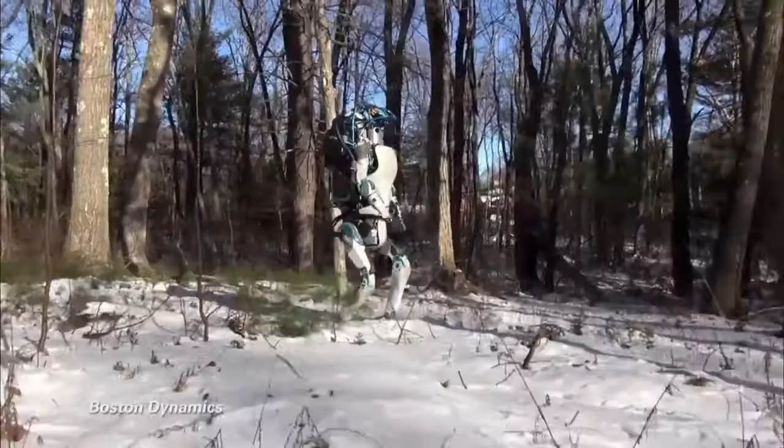In fact, a few months after the finals, Boston Dynamics, the makers of the Atlas robot, took this updated version for a stroll in a snow-covered woods. While it stumbles, it quickly recovers its balance, just as we would.

You know, I think we just need to approach this with our eyes open and understand our vulnerability to a technology that we are on the cusp of creating.

There's no question that developing rescue robots with the potential to save lives makes a lot of sense. But the potential for other applications remains unclear. The time is now to think about their role in our lives as we face the rise of the robots.

Where were our robot heroes? For generations, science fiction has portrayed robots as our loyal servants. Welcome to Altair 4, gentlemen. I am to transport you to the residence.

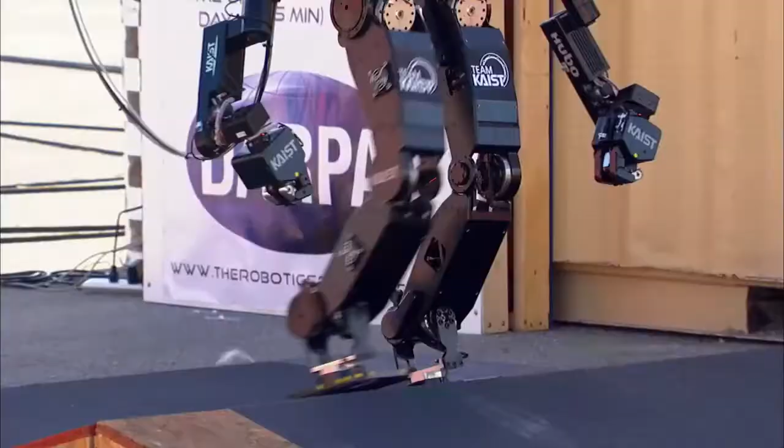In 2013, at a racetrack on the outskirts of Miami, DARPA, the research arm of the U.S. Department of Defense, challenged 16 teams from around the world to build rescue robots that can help save lives in a disaster.

Very exciting, very exhausted, very nervous, and frustrated at the same time. Dealing with robots is always like that. It's the kind of challenge DARPA is known for. Cutting edge and high risk.

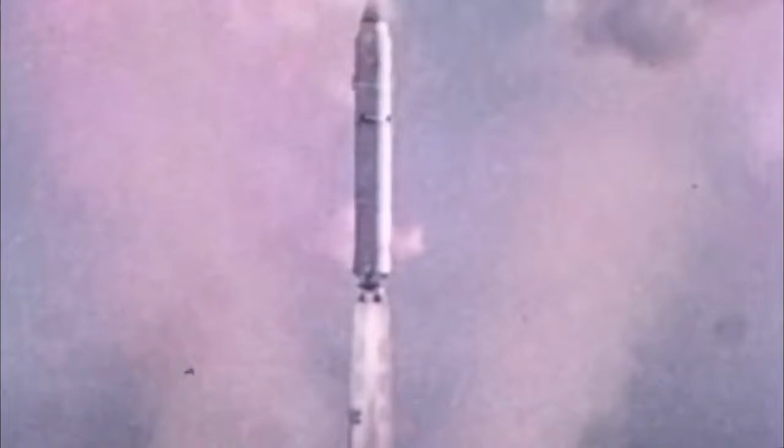Ladies and gentlemen, start your robots. The race to build robots that can save lives in a disaster, that can even rescue us. But to do that, they'll need to climb ladders, walk over rubble, turn valves.

And no one knows if it's even possible. There's so many things that could go wrong. It's scary. When you try to instill human-like intelligence, human-like manipulation skills into machines, it's just very, very hard to do.

What will it take for robots to have the right stuff? And are we ready for the consequences? It's too easy to look at them and say, oh, they're not there yet. They will get to something very powerful. And then you have to say, well, where will we have gotten to? They might actually have the capacity to be smarter than us.

What impact will robots have on our future? On how we work, how we interact, even how we see ourselves. Rise of the Robots, right now on Nova.

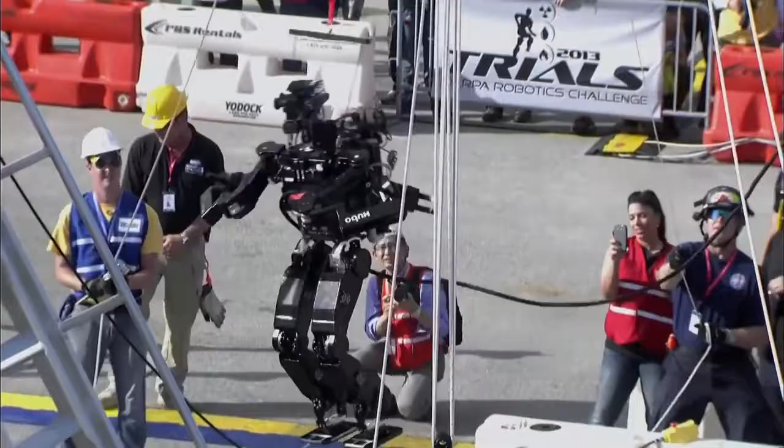Robots fall off ladders. Some barely move an inch. They even struggle to open doors. The things that a human can do instinctively, easily, you don't realize how hard something like walking is until you try to reproduce it in a machine.

When my baby daughter took her first step, did she walk? No, she took a step and she fell down, right? Over time, she started to walk. It's kind of like we're seeing here. There are a lot of baby steps.

After 2 days of competition, the results are not impressive. But this is just the start of DARPA's grand experiment.

The agency is giving the roboticists another chance to get it right, and they're putting their money where their mouth is. The top scoring teams in this first challenge are receiving $1 million each to continue their work. In 18 months, they'll return for the final challenge, and the chance to win a grand prize of $2 million.

It's not clear to me how well the teams are going to do. They can't be too hard, because then everybody fails. Can't be too easy, because then it's not worth doing at all. But if you make it just right, like Goldilocks, right? I have tried to hit the sweet spot of difficulty, but I think risking failure is the DARPA way.

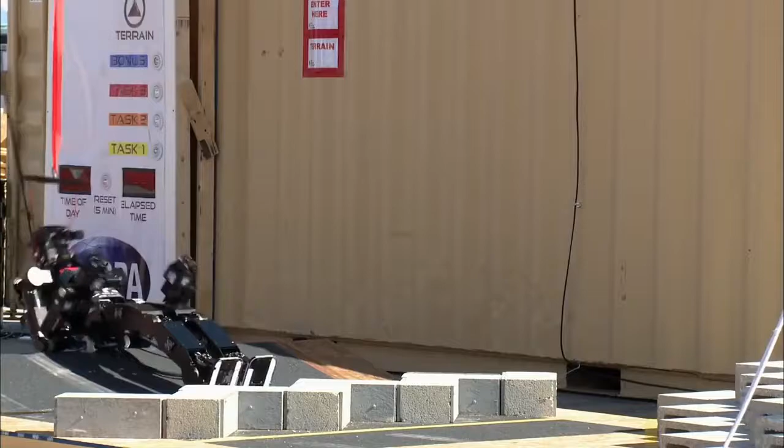Back in the early 50s, Alan Turing, one of the founders of artificial intelligence, said that the best thing we could do was build a robot with TV cameras for its eyes and motors to drive its legs and have it romp around the countryside and learn from the real world. But he decided that was technologically too hard back in the 50s, which it certainly was. So he said, let's leave that physical interaction to later, and let's work on more abstract problems.